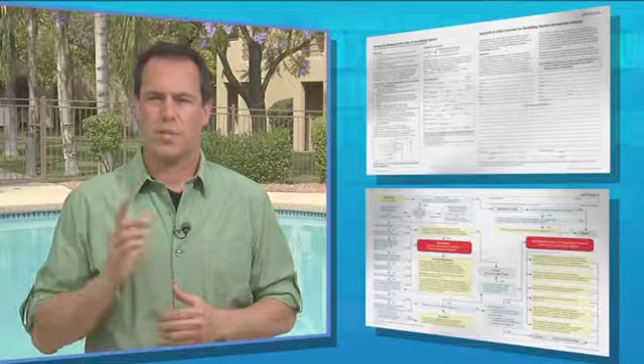We'll be using a flowchart from an American National Consensus Standard on suction entrapment avoidance. This standard is not part of the Pool and Spa Safety Act, but it does cover the steps necessary in addressing suction safety. You may use this or create your own inspection form, but be certain to cover all the issues. Inspection is a complex process when done correctly.

Let's assess the system. Of course, if your state allows pools to be built with no suction outlet, you may simply disable the current drain as allowed in the Pool and Spa Safety Act. By eliminating the drain, you have completely eliminated the hazard and all issues associated with human error.

Most of the reported suction entrapments and deaths have been caused by human error or oversight. Check with local or state representatives to see if drain disablement is an option in your area.

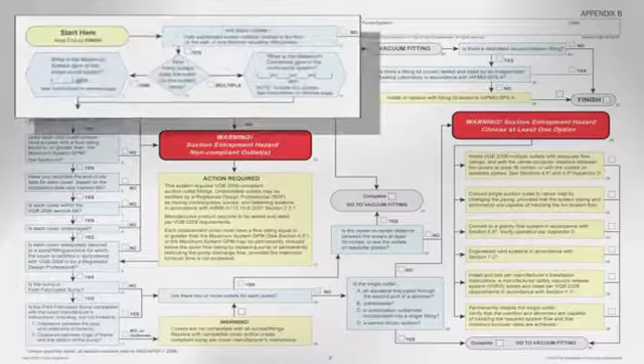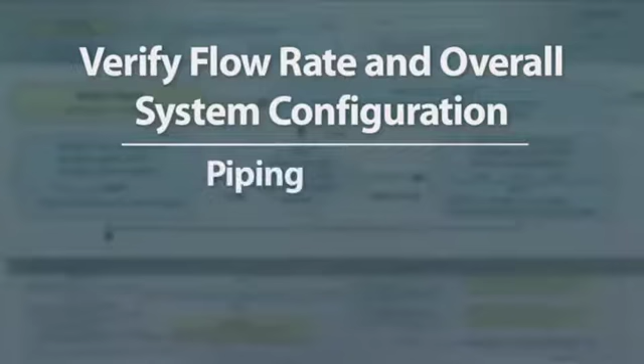If the pool has a submerged suction outlet, vacuum fitting, or skimmer equalizer, then you must take the necessary steps to verify flow rate and the overall system configuration, including piping, suction outlets, and pumps. Here we start with how many pumps an outlet serves, and ultimately will determine the total combined maximum flow rate in gallons per minute, or GPM.

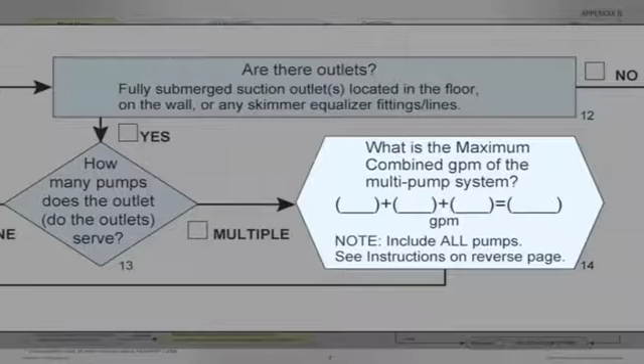Everything is based on this combined maximum flow rate, so it's imperative that you verify it, preferably with a calibrated flow meter or measured TDH and pump curve. If you haven't watched our training module on flow rate and TDH, please do so.

We are going to use TDH in a very different way than it is traditionally used for most state public pool codes. Please note that TDH estimates using hydraulic calculations are not accurate enough to ensure flow rate. To use TDH, you must measure.

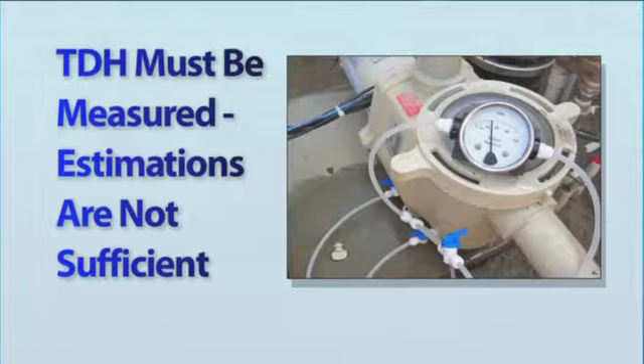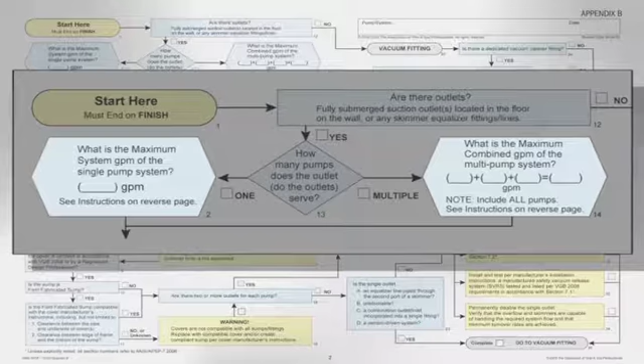Our overall goal in this section is to know the maximum system flow rate in order to size the suction outlet fitting. If there are multiple pumps connected to the suction outlet, assume they are all on and operated at the maximum flow for this system.

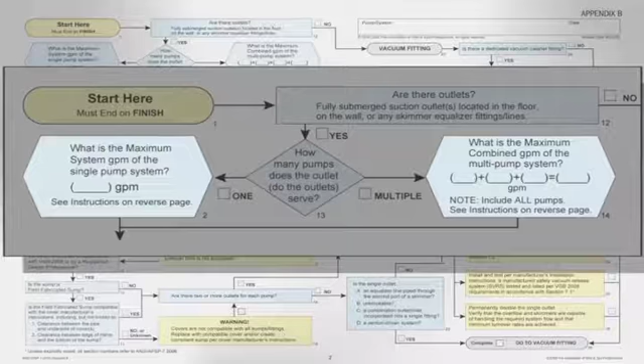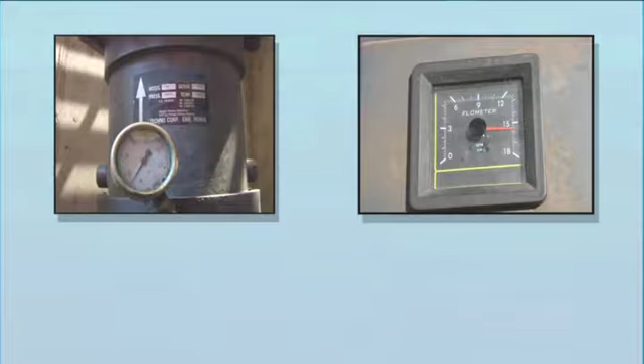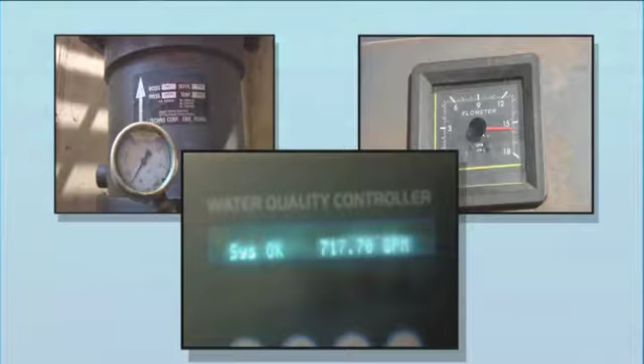It is impractical to use zero TDH on the pump curve, so some field verification may be required. Flow meters, or permanently mounted gauges, are susceptible to corrosion, incorrect installation, and loss of calibration. Don't allow a digital meter to give a false sense of confidence in the number. Digital flow meters can be installed incorrectly and lose calibration as easily as flow rotameters.

In general, make sure there are at least 10 diameters of pipe upstream from the flow meter, unless the flow meter is calibrated for use with less.

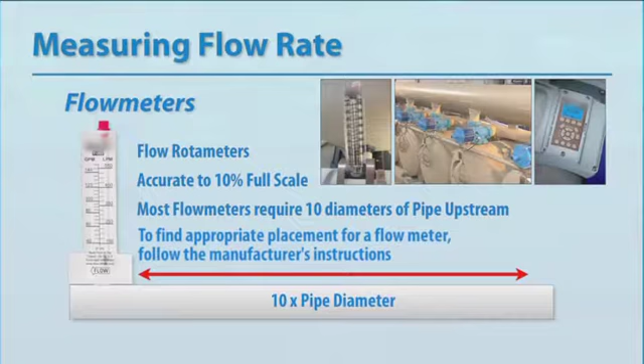In summary, our first step is to confirm how many pumps exist per outlet, the maximum flow rate of these pumps as installed, and then we'll assess whether the flow rate through these suction outlet covers is correct.